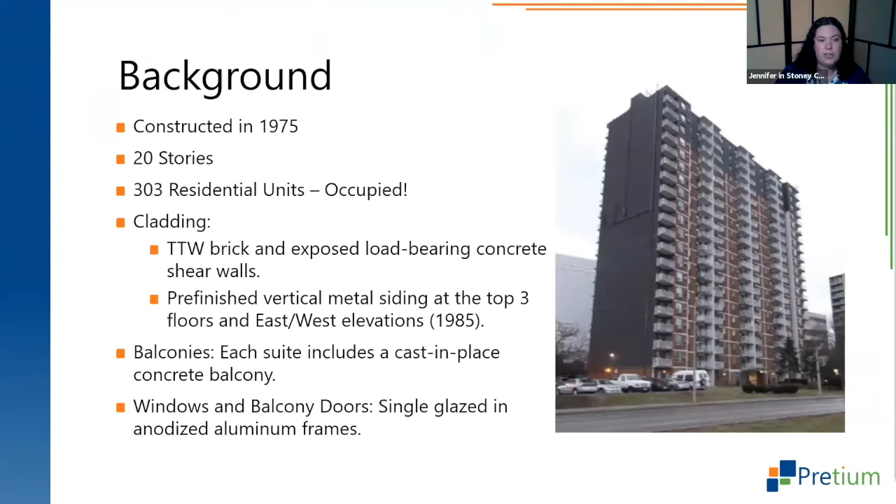Each of the suites in the building does have a cast-in-place concrete balcony, and those balconies are cantilevered to the structural slab. And the existing windows and balcony doors were single glazed set in anodized aluminum frames. The heating system for the building is electric baseboard heaters, and cooling is actually through wall-mounted units that are just plug and play AC units. You can actually see the line of them running up the image that I've shown there. Some units have them installed, others don't. Some units have big, giant, gaping holes where they've maybe stuffed a bit of newspaper. Not the best method for sealing, certainly.

The exhaust in the building is ceiling and wall-mounted fans in all of the suite bathrooms and kitchens, and the makeup air is fairly typical for this building typology. It's a continuously operating supply into the corridors. There are boilers on site that help to heat the makeup air and the domestic hot water.

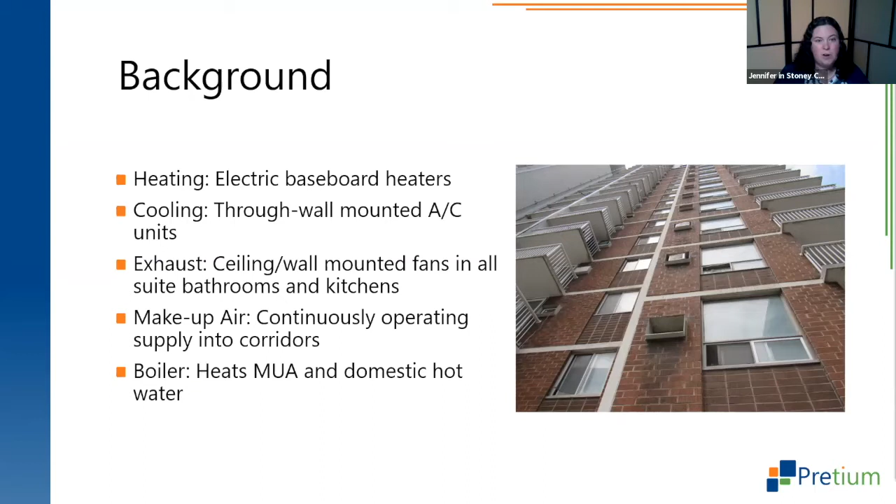So why EnerPHit? Well, the owner of the building, Windsor Essex Community Housing Corporation, has already gone through and really tried to capture a lot of the low-hanging fruit in their portfolio of properties. So they've done little things here and there, like lighting upgrades or other energy efficiency retrofits or even water-saving retrofits that are relatively easy for them to implement. One big driver for this project in particular was that a lot of funding is available for energy and greenhouse gas reduction projects in Ontario right now, particularly for social housing buildings. As long as you can show those savings are going to be in excess of 25%, you typically are eligible for that funding.

The client really felt that Passive House was a proven standard. They actually have one new construction project that's also currently underway. And that was something they were really looking for when trying to address deep energy retrofits in their building, and looking at a way to set this up almost as a pilot program so that they can then apply it to many of their other properties.

In this case, the building is located at a really desirable and strategic location. You can see in the photograph there, it's on Riverside Drive, it's right on the river. You can look across and see the US from this building. And I can personally attest to the fact that the views of the firework displays that happen over the river are pretty spectacular.

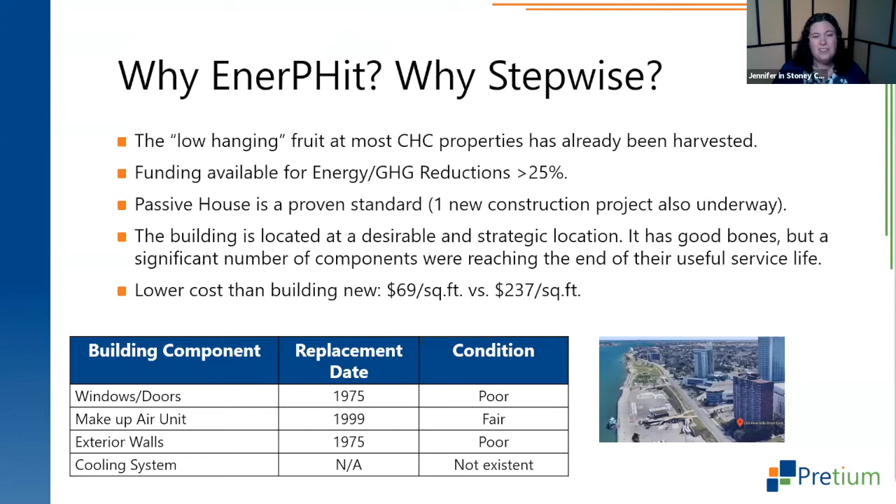The building has really good bones, but a number of the significant components were starting to reach the end of their useful service life. The little table I have there shows a quick excerpt from one of the building condition assessments we did, and you can see the windows and doors, the makeup air unit, the exterior walls. They were all reaching that point where some sort of major intervention was going to be required. So when the client looked at the amount of work they had to do to retrofit the building versus what they would have to pay to create a similar building elsewhere, the retrofit was quite a bit lower cost, at about $69 a square foot, versus the new construction, which they anticipated would cost in the neighborhood of $237 a square foot.

So essentially, as was well introduced before this presentation, this stepwise approach allowed them to plan all of these retrofits in a way that made the most sense for the building and also allowed them to work within those funding constraints. The other part of it was, obviously, the building is occupied. It's really just not feasible to do all of it in one shot. And as I'll talk a little bit later, you'll see how even just one aspect of the project had a pretty significant impact on the lives of the people living in the building.

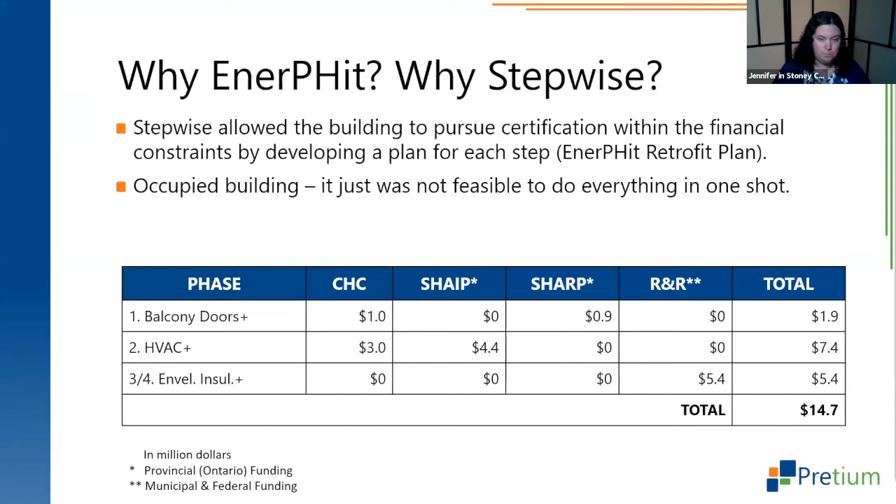And this actually took place before the project team became involved. The client, knowing that they were planning to pursue either Passive House or EnerPHit in some way, shape, or form, did actually plan the project well, and they included the use of a Passive House certified patio door. But that part of the project was done almost as a pilot in advance of even completing the full EnerPHit feasibility study.

The second phase is the mechanical systems installation. That phase of the work actually just achieved substantial completion about a couple weeks ago, mid last month. We're still working on tying up a few deficiencies and completing some testing, but the bulk of the work is finished at this point. Phase 3 and 4 is going to be the building envelope, the walls and windows. So that'll be overcladding and replacement of all the remaining windows at the site.

And then there's a number of pieces of future work that are going to take place a little bit further out, typically at the end of the service life. Those were originally planned to be the domestic hot water pipe replacement and insulation of those lines, elevator upgrades, and a roof replacement. Now, because of some changes to the plan, the elevator upgrades are actually underway as we speak, so that project has moved forward slightly from their original plan. When all is said and done and all of this work is complete, based on the PHPP modeling, we're looking at about a 65% savings in total energy for this building.

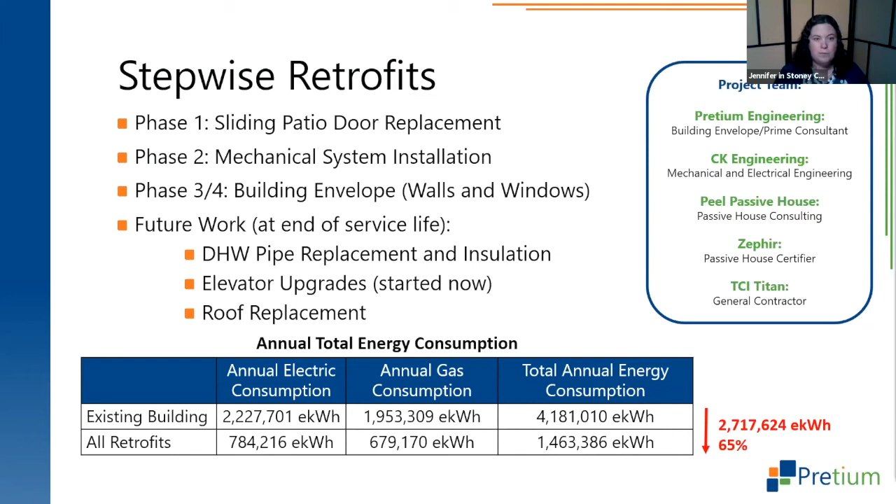So how did we handle this? How did we manage this process? Well, a detailed matrix was developed identifying each of the units and the 10 tasks, and systems were put in place by the contractor and by the ownership team to make sure that notices were being delivered to those units in advance of entry in accordance with CHC's policies and requirements. Management of the suite accesses, notices, delivery, and tenant interactions was actually a full-time job for probably at least one staff on the contracting side, as well as one staff on the ownership side. For something like this in the future, out-of-the-box thinking would really be required to try to develop a better system for construction sequencing.

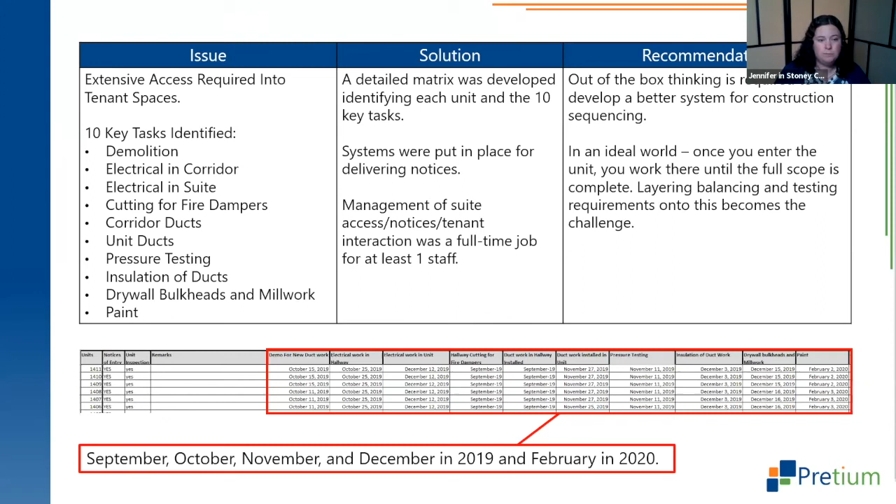Another issue we found early on had to do with space. That was one of the things that we had at our forefront at all times. So I've got two issues here to highlight that. The first is the hallway ceiling clearance requirements. So our design actually had to be down to the millimeter in order to make sure that we were able to meet the Ontario Building Code's requirements for ceiling heights in the corridors.

One of the things that we highlighted with something like this for future projects is that we really should have constructed a mock-up right at the outset prior to starting the project. We did do mock-ups once they were mobilized and as we were working through these details, and we had a few conversations with contractors initially, but I think taking it that next step further and actually having a section of this installed at the outset would have been very beneficial to our scheduling once the project started.

The other aspect of this was just in general lack of space for mechanical equipment. So in this case, we actually converted 4 units to mechanical rooms to house the ERV units. And we also had a loss of closet space in many of the units to create things like risers to house equipment and for other ductwork.

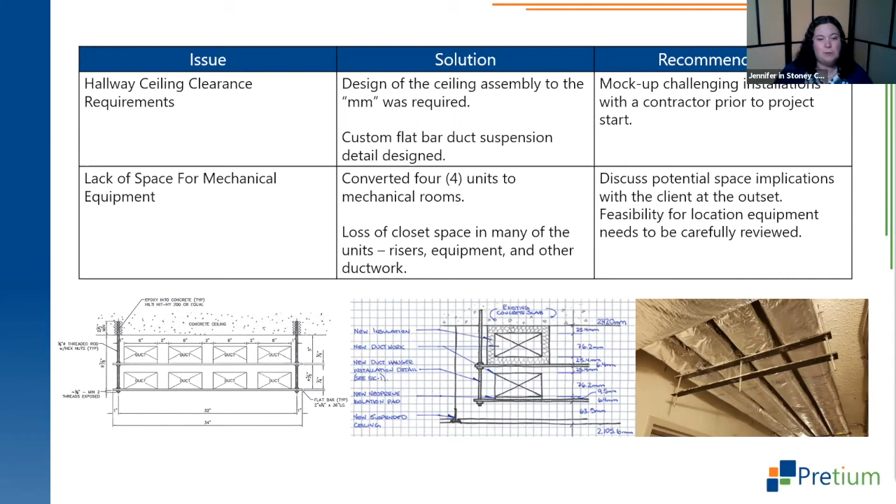All right, so I mentioned that we took away some closets for running risers. That created a pretty interesting challenge for us. So in order to create those risers, obviously we had to core through the existing floor slabs. And one of the things that we ran into was a lot of embedded conduits.

Now, one of the things that we did consider was a different type of scanning, something like an X-ray, which likely would have been more accurate. However, there's a lot of implications with doing X-ray scanning in occupied buildings. And at the time, the benefit and cost didn't seem to work out from the client's perspective. So we implemented a couple of things for safety, obviously.

We utilized a special piece of drilling equipment that was attached to the core drill. And it actually was designed so that as soon as you were about to come in contact with any live wires, it actually shuts the drill off. This was a huge, huge benefit on this project and made a big difference for us.

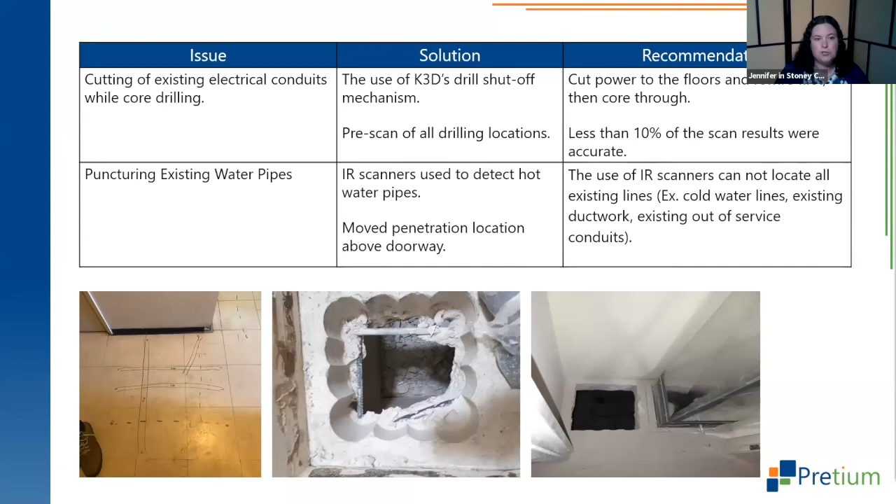All right, a next challenge that we found, which is somewhat common in existing buildings, is in some of the areas where we had opened up drywall to run our ductwork, some of the existing electrical wiring didn't actually meet the current ESA standards. Now, technically, we weren't touching this wiring. We weren't running any electrical in there. We weren't doing anything to it. It was existing. It was remaining existing. It was completely outside of the scope of our project.

Unfortunately, the ESA inspector, when they came by and saw it, identified a couple of things that they felt were safety hazards. Because they felt they're safety hazards, we weren't able to basically sit back on our laurels and say, well, you know, this was how it was built and it met the code of the time. That's not really the case. Obviously, if there's something that's a risk to safety, they would like you to address it.

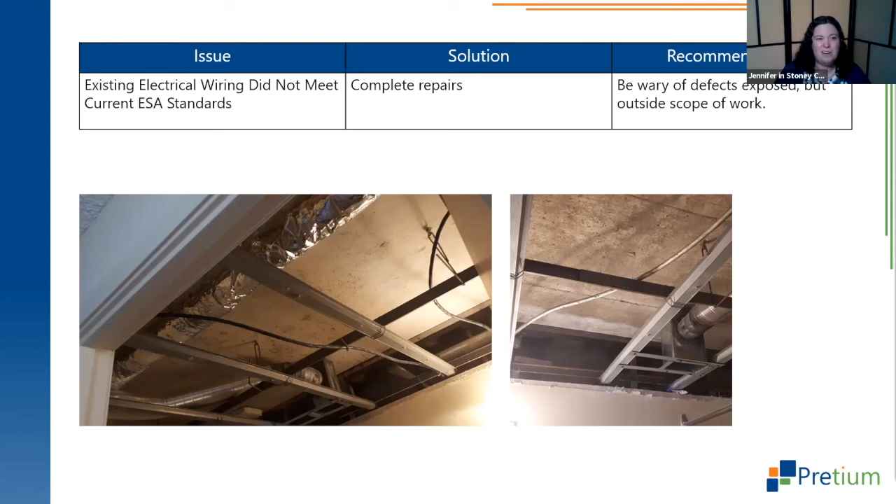So we ended up having a change order, obviously, on the project, because this is work that we never would have expected to have to complete, where the contractor had to make some adjustments to how the wiring was supported within the ceiling space, anywhere that we opened it up. So just be wary, obviously, of defects that are exposed, but outside of your scope of work. That's something in an existing building that can kind of pop up on you that maybe you weren't planning on having to deal with.

Next was an issue we ran into with duct air leakage testing through fire dampers. So one thing we found was this building, obviously, we had to use a lot of fire dampers. We were creating essentially new penetrations through floor slabs, through fire separations. We were creating new penetrations through wall fire separations from the unit to the corridor. So obviously that meant lots of fire dampers.

One thing that we found when we went to do pressure testing of the ducts was that particularly the fire dampers, when we were testing the runs for the vertical riser, because they're basically every 7 or 8 feet, depending on the floor to ceiling height, they were having a pretty significant impact on our testing. And the fire damper manufacturer was not very comfortable at all with us testing these fire dampers via the pressure test the way that we were hoping to.

Our solution ended up being that we took the measured air leakage of those duct runs and we subtracted the manufacturer specified leakage through the dampers to basically try to remove whatever the extraneous leakage we were going to be seeing that was occurring as a result of things like the damper arm and some of the other penetrations that are required as part of the fire damper.

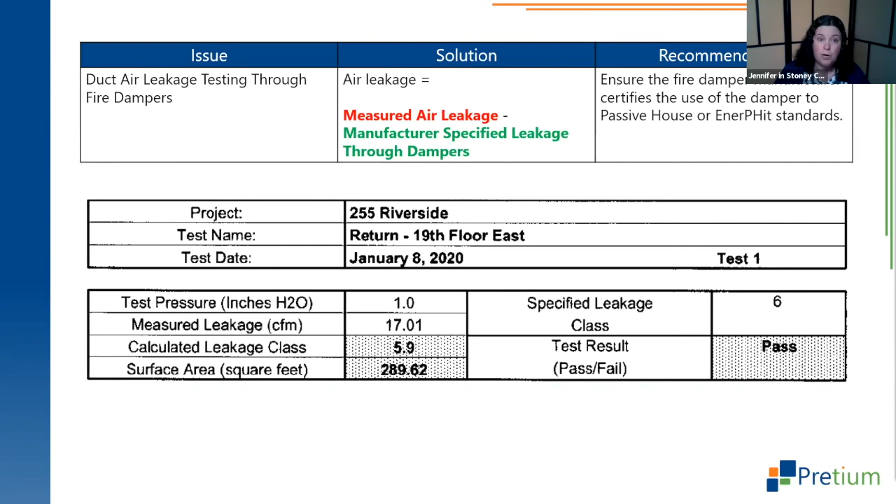Going forward and in the future, we would probably try to look to have some discussions with the fire damper manufacturer that's being specified, or even at the shop drawing phase, to sort of more clearly lay out with them what the requirements are going to be for that testing and ensure that the product that they're planning to use for the project is going to be able to meet the testing requirements.

So the last one I'll talk about today is tenant interference with the ventilation system. So this is actually a really interesting issue that has just popped up over the last 2 months, I would say. So we have our wonderful system, we've installed our ductwork, the grills are on, the machines are installed, we've started to commission them, and it's time to do air balancing.

So obviously what happens then when we try to balance the system is we're getting units where we're finding a significant variation from the design CFM to the final actual measured CFM. We made a lot of efforts and worked really hard with the client and the representation on site.

We had the contractors enter these units, remove all of the coverings off of the vent, and basically speak with the owners one-on-one, or the tenants one-on-one, to say, you know, this is why we're doing this. And despite that, many of them advised, as the contractor was walking out the door, basically, as soon as you leave, I'm putting it back.

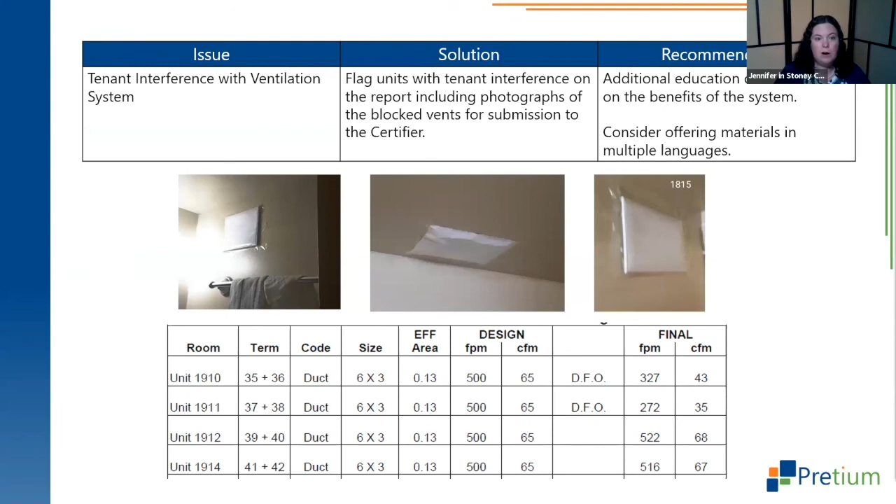So one of the things we've talked about is considering offering the materials in multiple languages, or even having representatives from the client side who are fluent in other languages to sort of help offer some additional education sessions for people who are having difficulty sort of understanding what we're trying to communicate to them.

So that pretty much brings me to the end of the presentation. I guess at this point, we're going to open it up and take some questions.